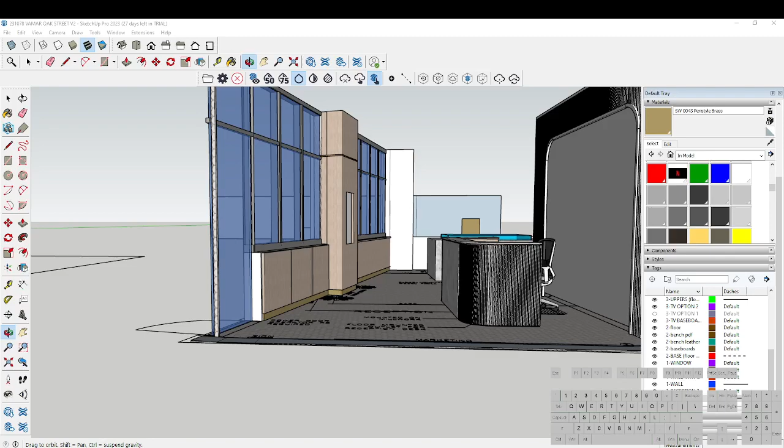Okay, so just to go over the project, basically following the drawings, we have a baseboard and a line. So there's a 4-inch kick, and that's it. It's kind of the first option we started.

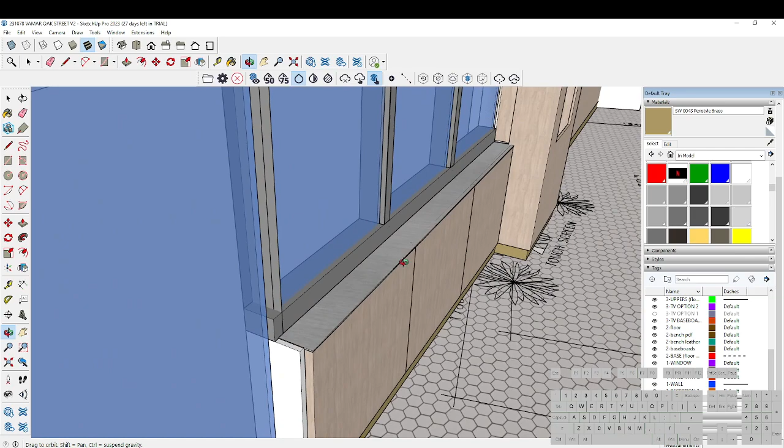We did recess, and these panels we recess. Then you have a cap, metal cap on top, whatever color, and we were thinking to miter this box and then have another 1/4-inch panel on the back, because the casing of the window is only, I think, 1/4 inch or 1/8 small.

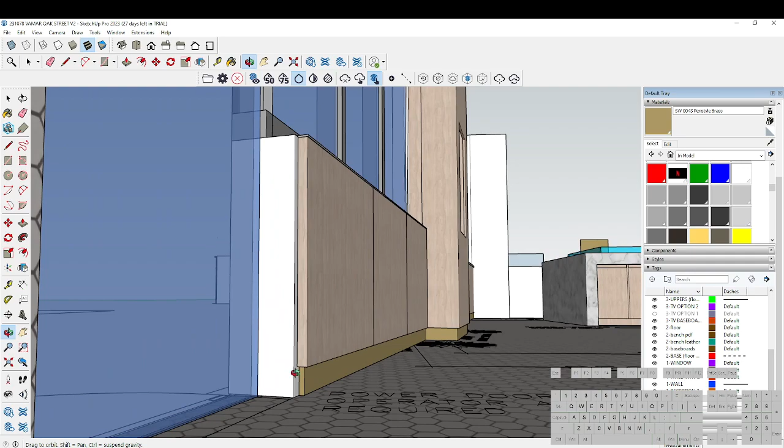But then one of the other areas in the sales area is showing that there's a reveal, a 3/4 inch reveal. So the second option is we kind of did this.

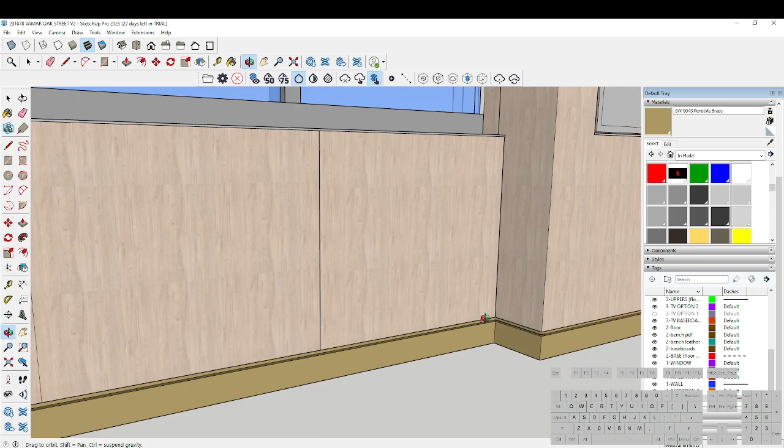So we prepared, so now there's going to be a nice reveal. The baseboard is flush with the panels, and then we have a 1-inch or 3/4 inch reveal. These panels are mitered, and then we have another reveal on top, again mitered on top.

So they're 3/4, and then we have another panel. Again, because of the windows, they're not this thick, they're actually only 1/4 inch or 1/8. So we have a step.

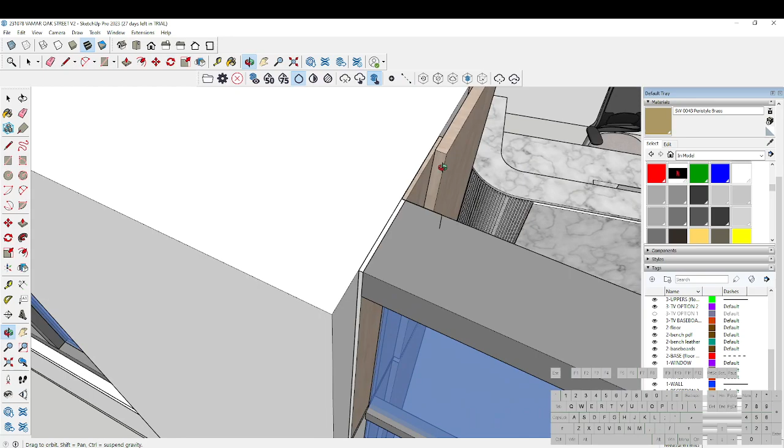From the back, from the window, you're going to see this part, which is going to be edge banded, and it continues. In line with this, the panels are attached to the wall with the reveal, so it goes all around.

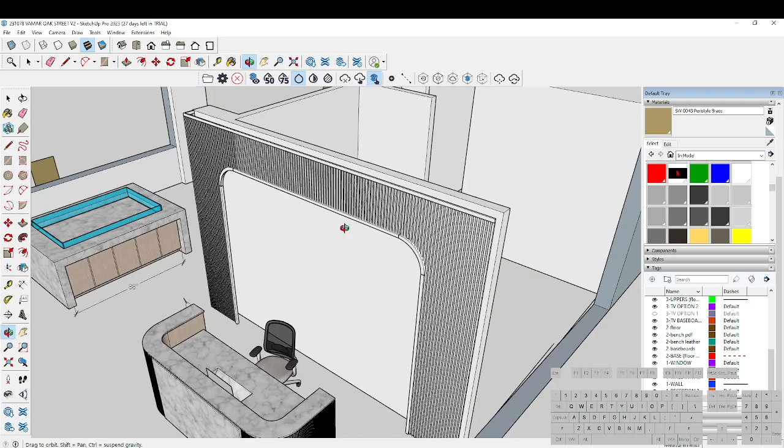And now going to the desk, these wood panels are kind of going to the ceiling, and they're wall to wall. The only thing is we stepped 1.5 inches, 2 inches from the edge.

This one, as we discussed, is going to be painted wood pieces, so we can bend the MDF, the stone on top, the stone front panel.

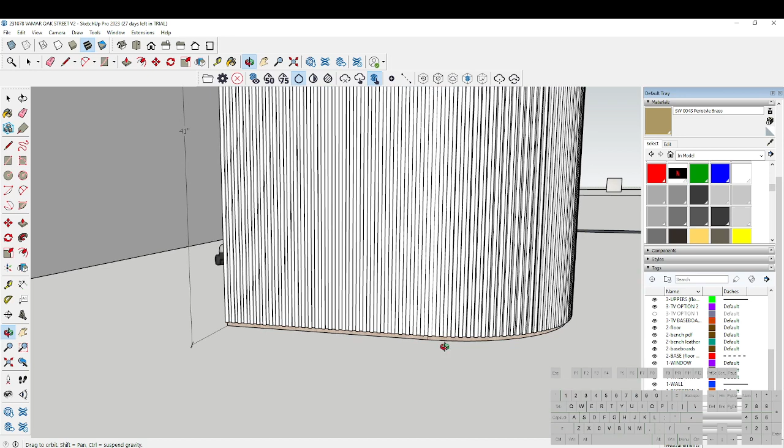We just got to discuss this little detail, the reveal inside, and then the bottom detail, the reveal, we have it the same wood, and inside it's just laminated pieces. So the desk inside is laminated.

And we got to discuss with the stone guy how we prepare this area. So this is all laminated.

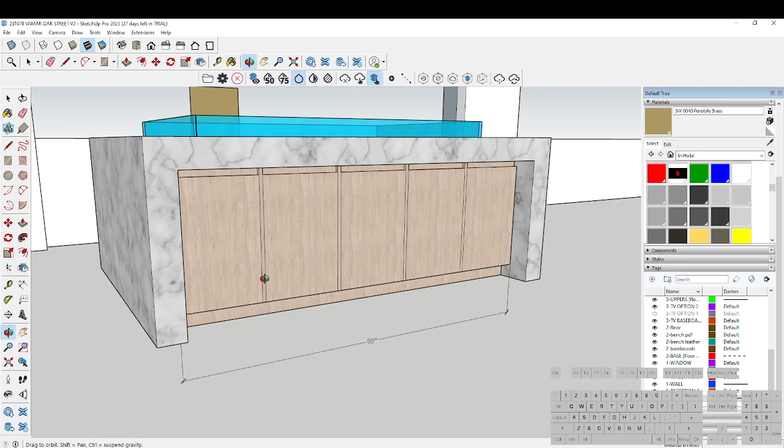That's this desk, and then this one, again, I'm not sure why they had these 3/4 inch panels, but that's the divider. So all these cabinets are separate.

Then we got to discuss about the stone, and they want some sort of access here.

The benches, I kind of again follow the drawings, that's how they look. So they had this cutout, veneer, laminate, and then this is the wall that's kind of very confusing.

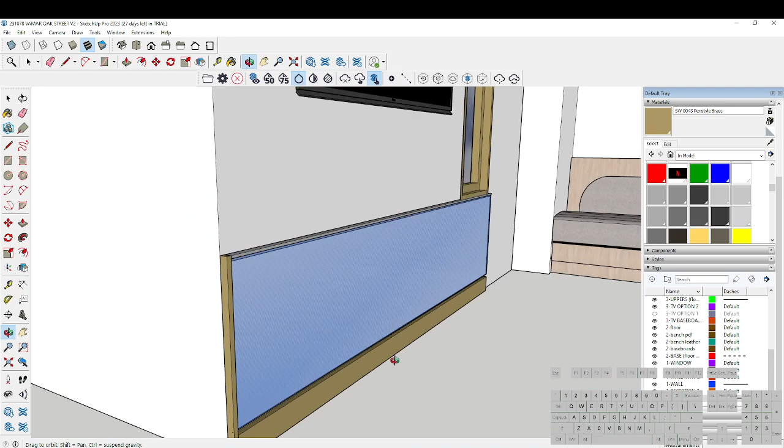So they want this glass flush with the baseboard. This is where they actually show this detail of the baseboard with the 1-inch reveal, and then they have this again.

So this is a mirror, and this is some sort of glass that we built into the wall, but it kind of ends here. So I'm not sure if this is some sort of special thing that's supposed to go here, what goes here.

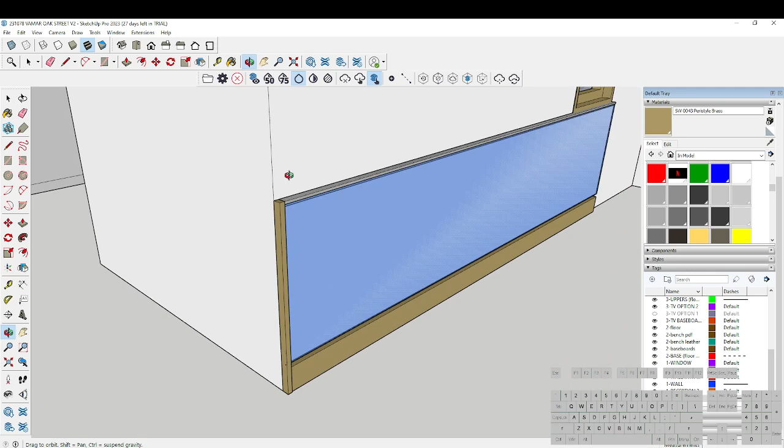We have a question, how do we finish here? Do we just P-lam this? And then the top says metal, like anything goes on here. So there's a lot of questions how to finish this area.

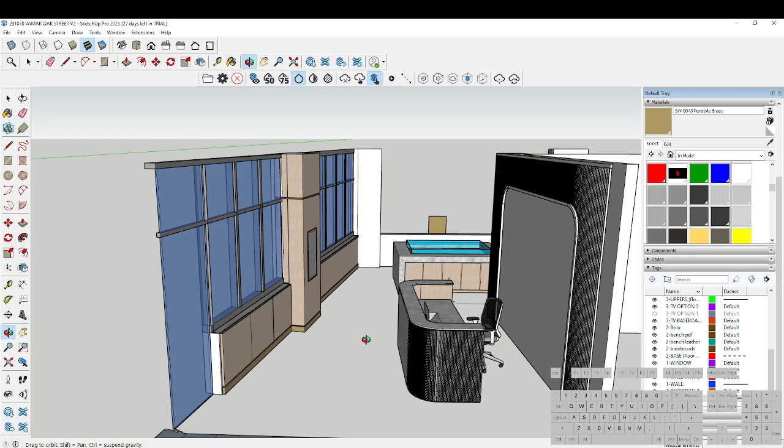The bench is pretty straightforward, and yeah, so if we can talk tomorrow and just go over this, and if you guys have ideas or suggestions or modifications, maybe which way do we go, like this, or do we go like the drawings say, just recess it back, have it recessed.

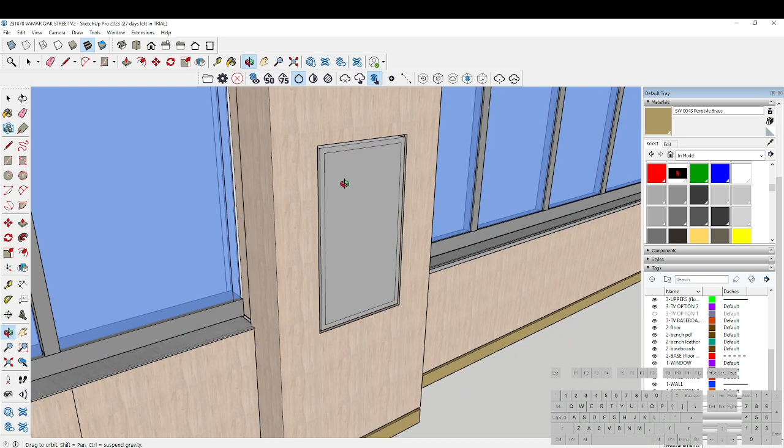I'm not sure. I think it looks nicer with the reveal all around. It'll look much fancier than the TV. We also kind of need the size, and then we just do a box inside, and all this stuff.

Yeah, so let's talk tomorrow about this. Let's talk with the stone guys, and then we can meet with the client and go over all these details.